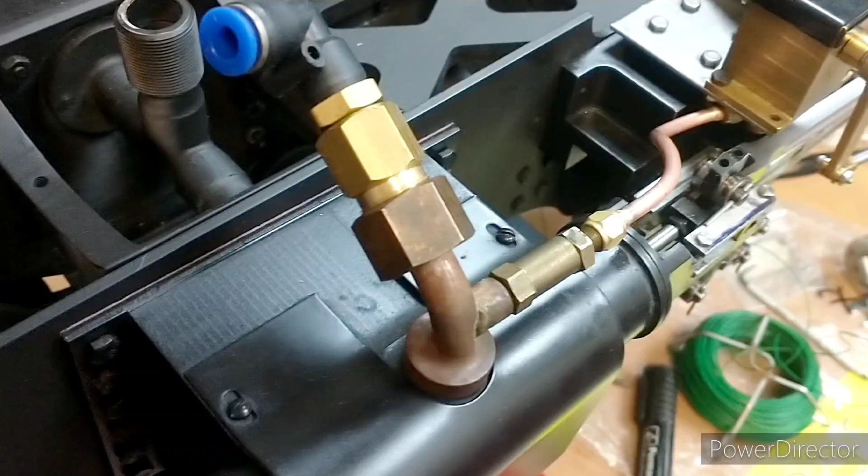So today we'll have a little bit of a break from the valve gear. I don't have so much time this week because I had to go to a wedding at the weekend, so I thought I'd just have a slight diversion and look at the lubricator setup.

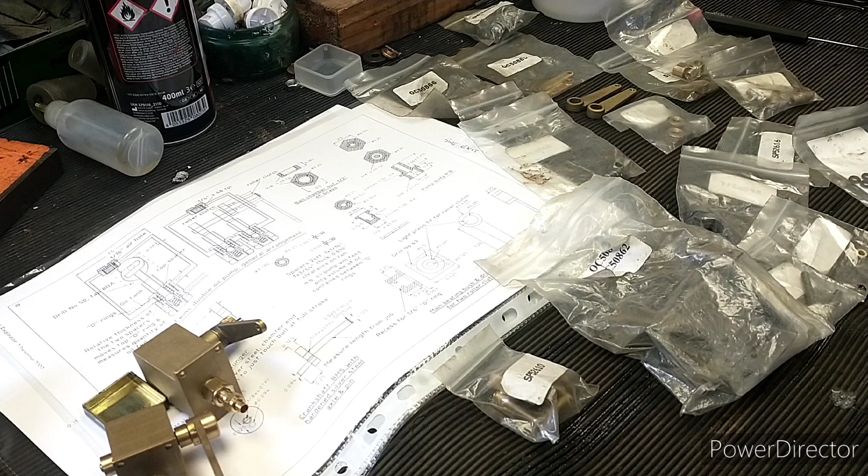So what I wanted to do is explain a bit about the lubricator design that's used by Modelworks. It's actually quite a well-known design, and you can still buy the kits for it to this day. I thought I'd explain a bit about it because it's quite an interesting design, and then I'll explain what I'm going to do with the Britannia in this particular case.

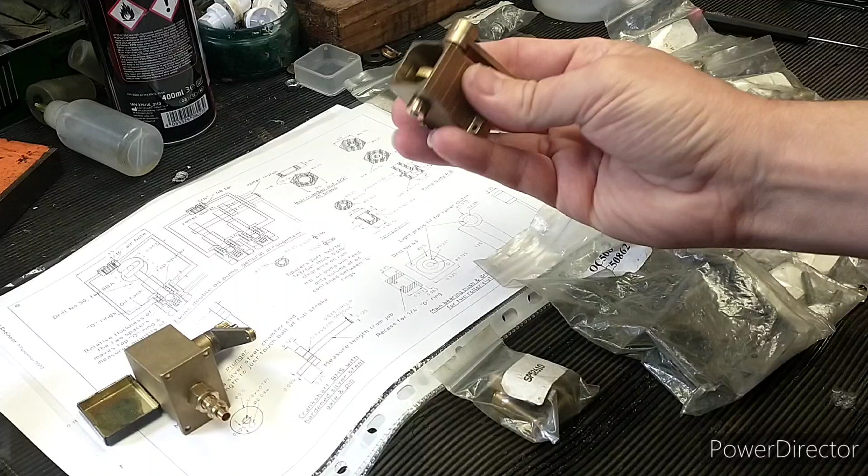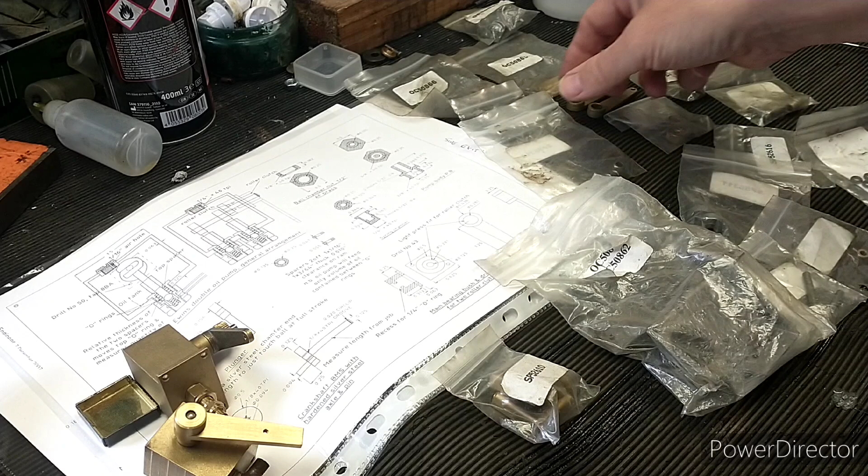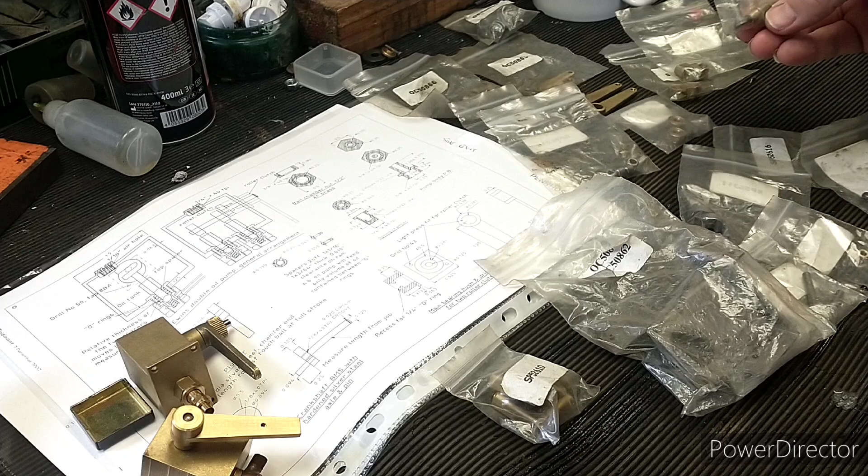On the Britannia kit, the lubricators weren't provided fully assembled like this. This is actually a Ewins lubricator that I managed to buy from eBay, but in my kit, which isn't complete, the lubricator came as lots of parts, and I've got most of the parts. The most obvious one is that I'm missing the bodies, which is a bit annoying because that's quite a difficult part to make. It's a cast part, and a few small detail parts of the internals.

But I've actually got quite a lot of the parts, so probably in the future I will use these parts to make up some lubricators. If that's something you'd be interested in seeing, let me know.

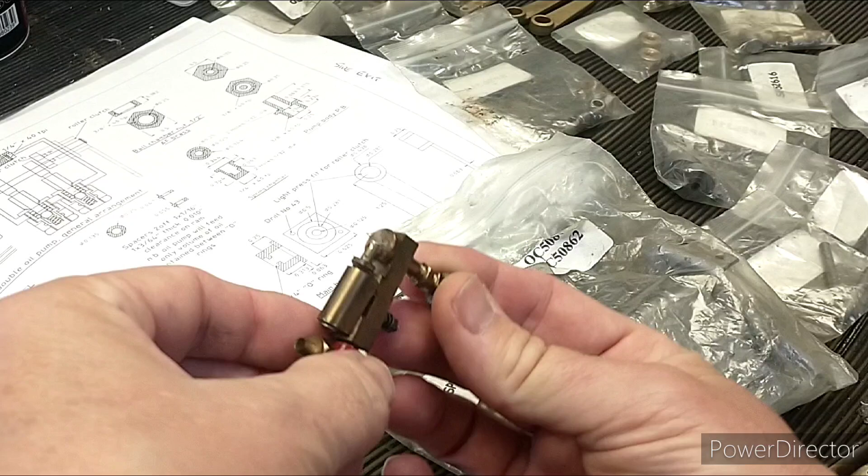So a little bit of history. When mechanical lubricators were first used in model locos, quite often they would use this sort of design.

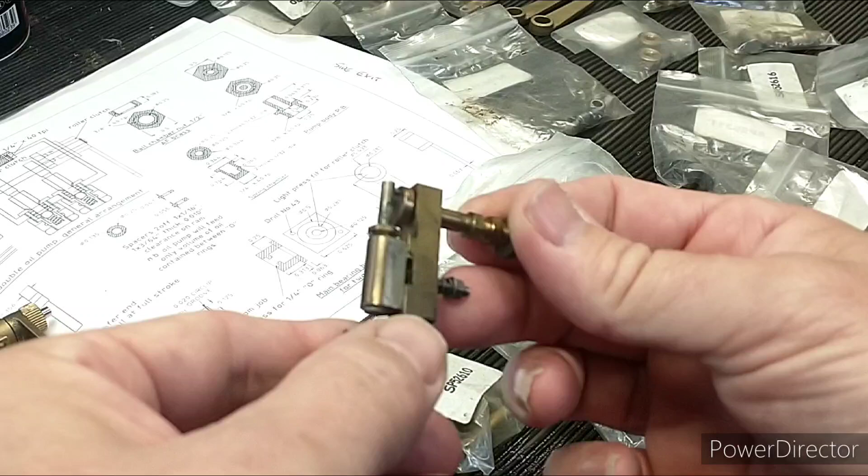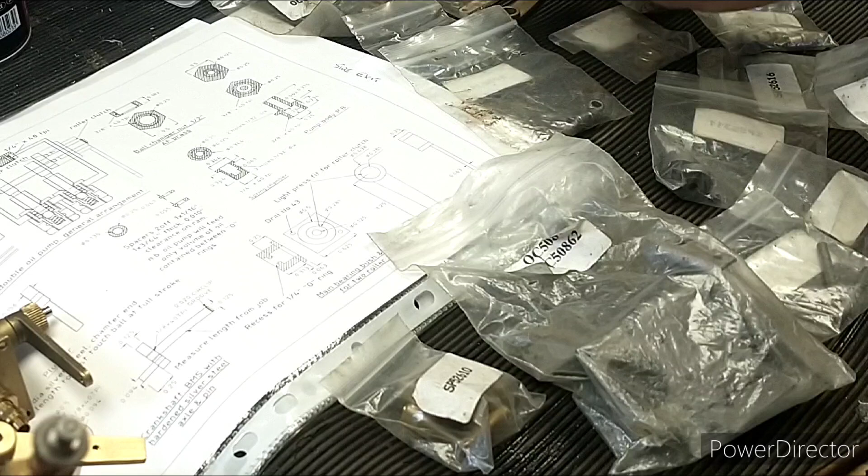Luckily enough, I've just got the innards of one here. On the outside we have a ratchet wheel. If you remember, I did a video on Caterpillar fitting a lubricator, and that had this sort of idea where you have a lever going backwards and forwards and moving a ratchet pawl, so over time this wheel would rotate.

But on the inside, what we've effectively got is a very small oscillating engine, and that's just a little oscillating pump, and that would just pump a very small amount of oil for each rotation. But it's actually, if you look at it, it's actually quite a complex thing to make. There's a lot of parts and quite a lot of accuracy required to make those parts.

But you've got a non-return valve here. I'm not sure where the inlet would be actually. Not that clear. But that's sort of the LBSC style lubricator, as far as I know.

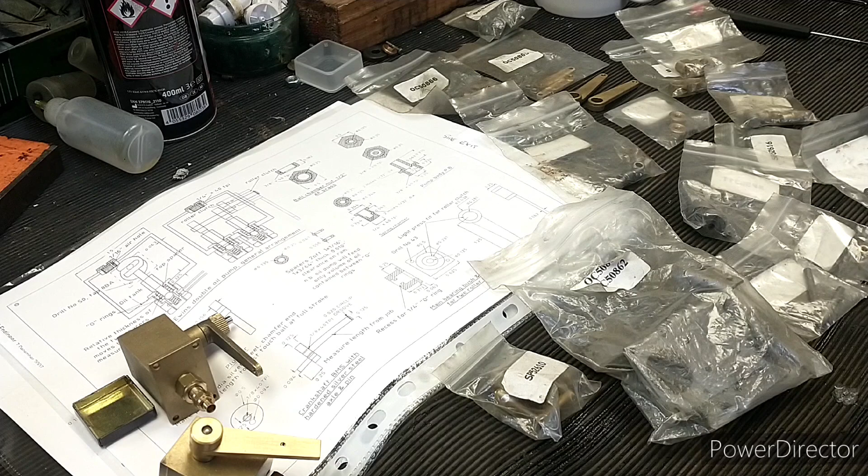So the Winson and Modelworks lubricators are based on a design which originates from a guy called Jim Ewins. I don't have a printout of his original articles, which are in Engineering in Miniature, but there's a couple of designs in Model Engineer that used his design.

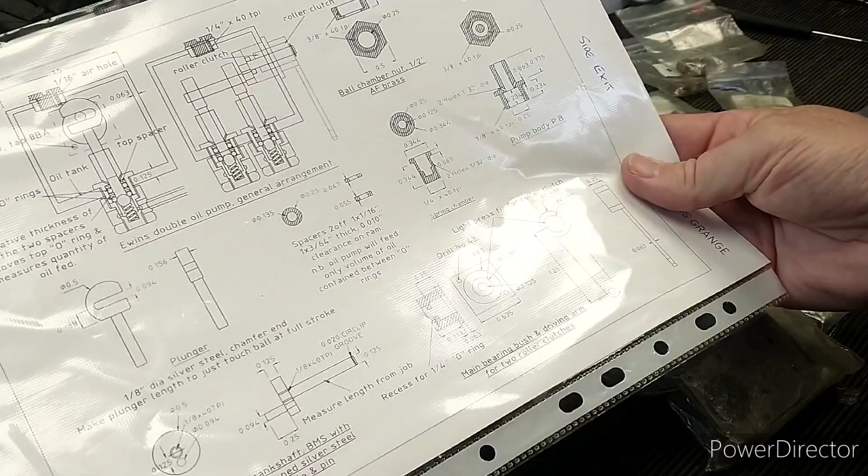So this one's from Model Engineer, 7th of December 2007, page 687, and this was the design for Penrhos Grange, and this is actually a dual pump.

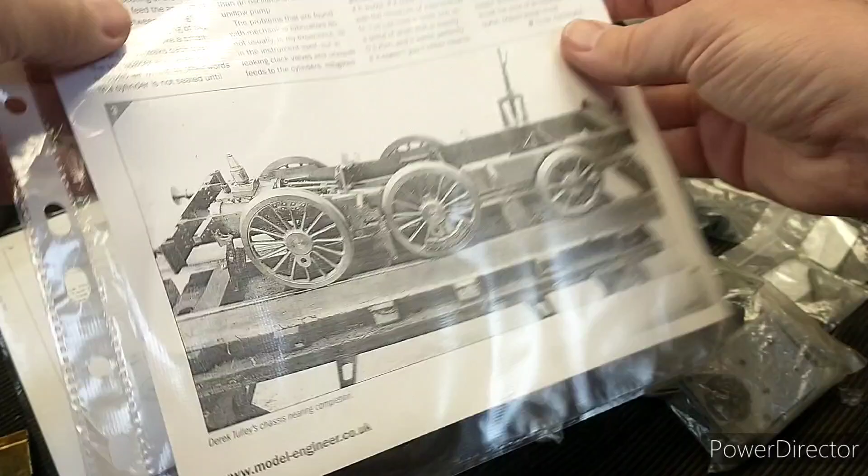It also existed in another design, Model Engineer, 13th of August 2010, page 210, and this is for a single pump design. Now I've printed both of these out because...

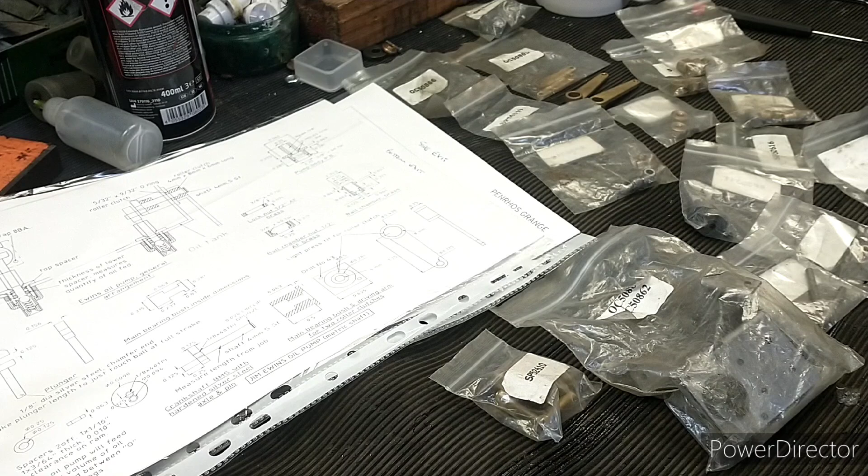If you buy, you can buy these kits from LiveSteam Fittings. I'll provide a link in the video if I remember. I believe they had some connection with Modelworks, whether it was a spin-off company from Modelworks, but that's still going today.

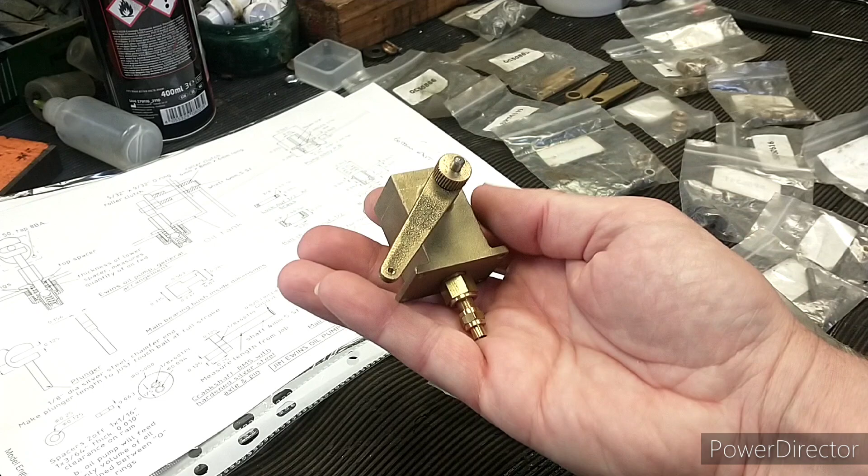And if you buy a lubricator from them today, this is basically what you get, something like this. And you'll notice it has a bottom feed. The Modelworks kits, on the other hand, have an elbow feed, and that's what we really need for Britannia.

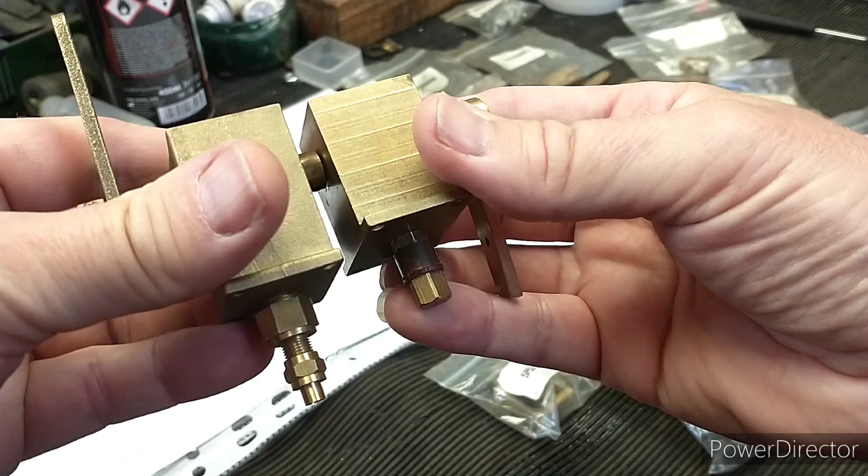So I've got these two. Obviously they're different size. I didn't realise they were different heights. Oh, that's annoying. Oh well, you probably won't notice. I might have to cut some off the top of that one. In fact, interestingly, there is a line there.

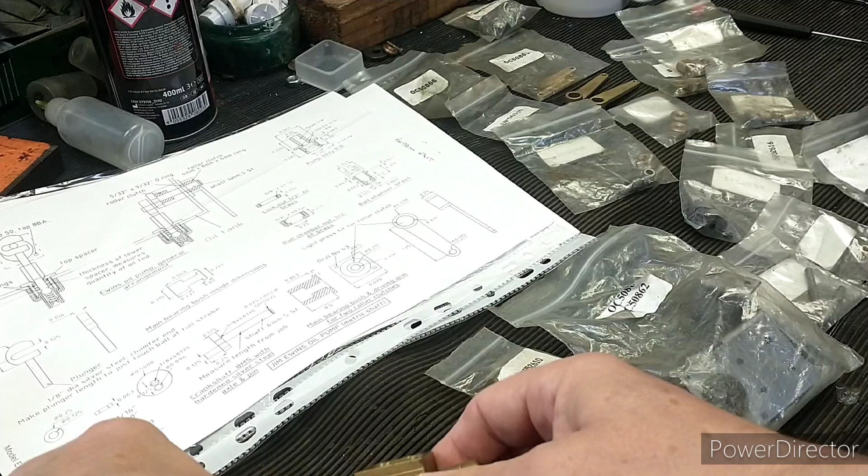So what's so good about the Ewins design then? He came up with a couple of innovative ideas.

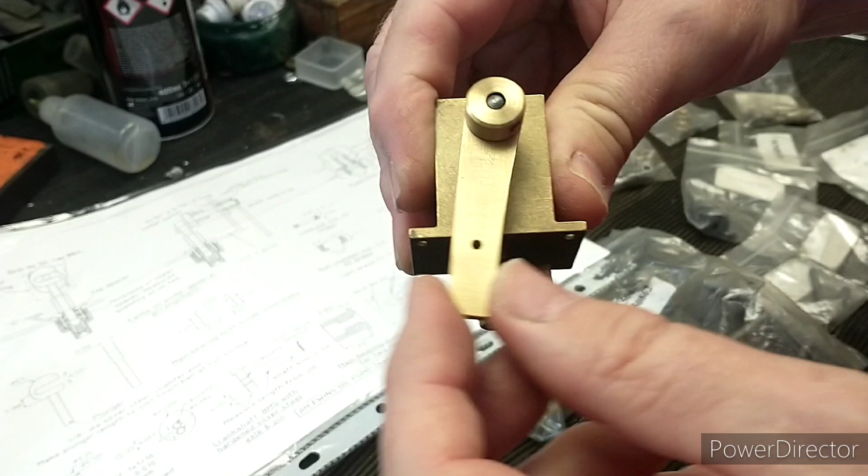The first thing is he got rid of the ratchet wheels. So you'll notice if I just rock this backwards and forwards, there's no ratcheting sound at all. It's quite smooth, and the oscillating action is turned into a rotary action. You can see that easiest on the front.

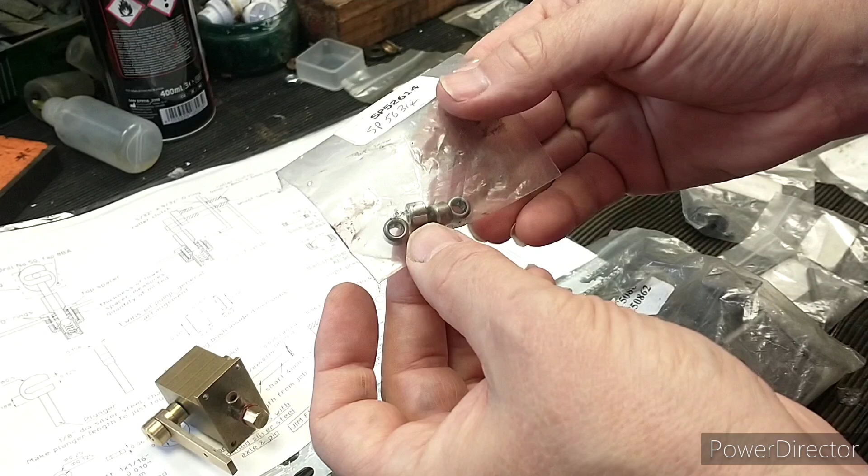So how does he do that? How does this magic happen? Well, he does it with these things. Now, they might look like very small bearings, but actually these are roller clutches.

A roller clutch, you mount it like a bearing, so the outside is fixed and the inside has a close-fitting shaft. Basically the way they work is that you can rotate the shaft in one direction, but when it comes to the other direction, it locks up. It just uses some clever geometry inside the bearing to do that. These are quite reliable as long as you keep them clean.

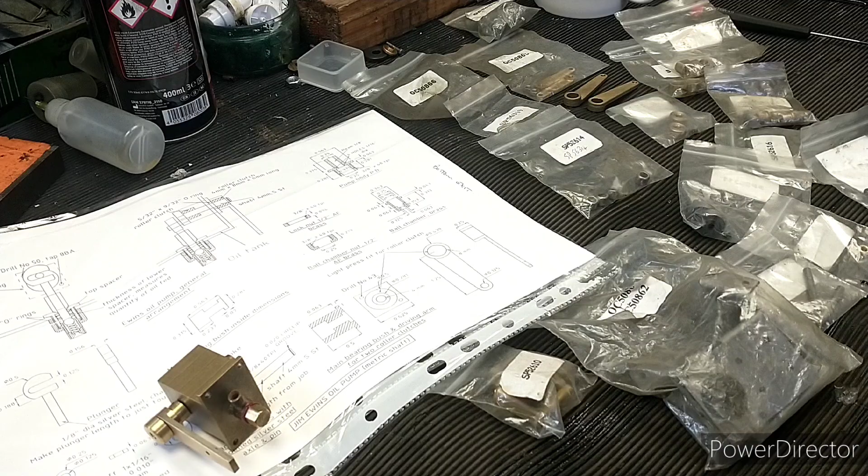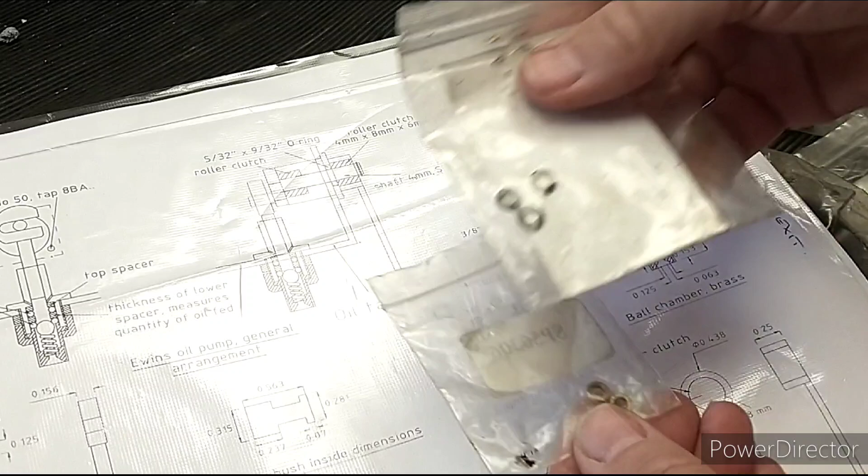So that was the first innovation that Jim's design used. And the second one, it's quite hard to see on the drawings, but the pump plunger basically goes through two rubber O-rings like this, and in between the O-rings is a spacer.

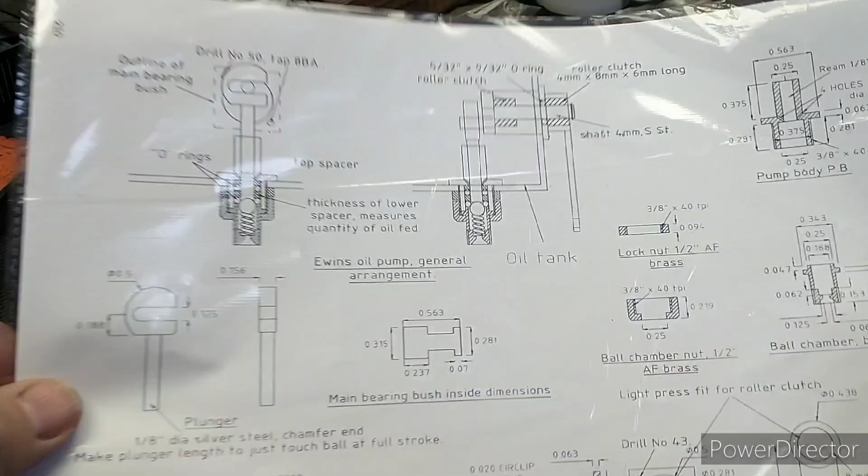So a very small, thin spacer. Let's just see on this drawing. You have an O-ring here, an O-ring there, and in between is a spacer. The gap between the two O-rings determines how much oil is pumped.

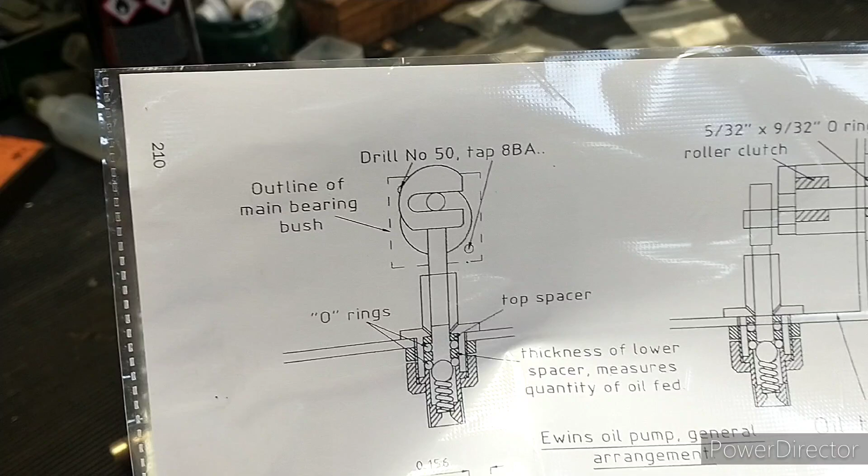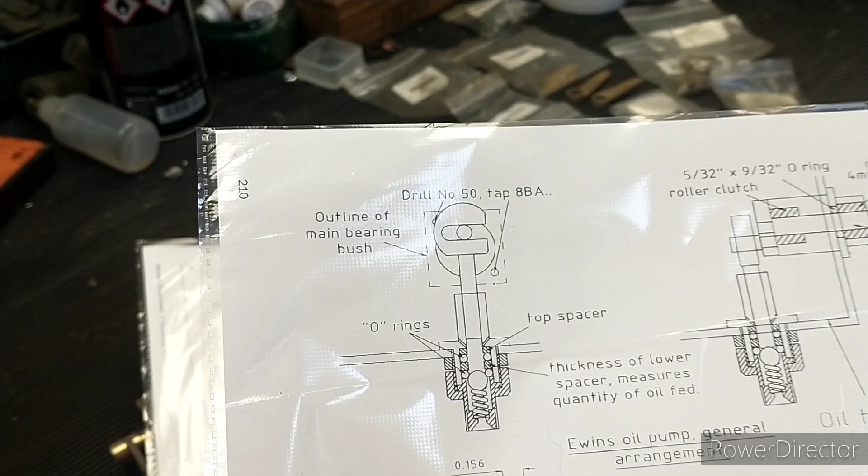The other nice thing about this design is there's only one non-return valve, which is this spring-loaded ball bearing here, and that seats up against the O-ring, so you get a very nice seal. Those things together combine to make a very reliable lubricator that works very well.

There's quite a few people in the model engineering community who really like these, and I'd say you can still buy them.

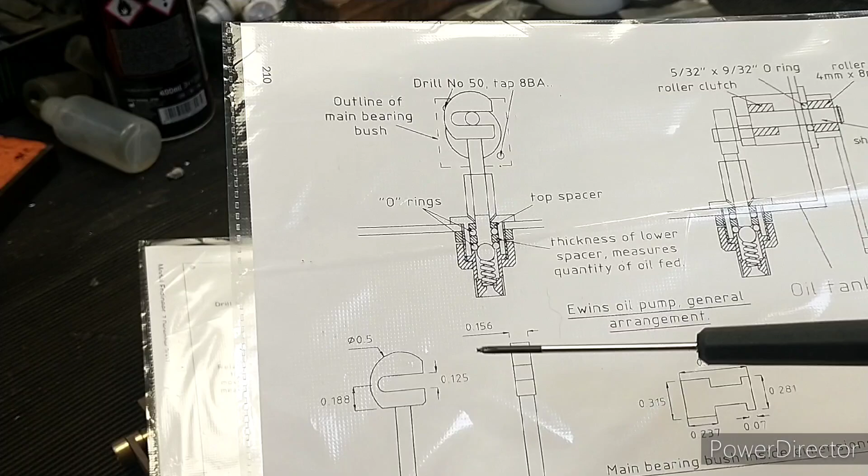So while we're looking at this drawing, you'll notice Jim's original design is the plunger has this sort of C shape. Basically what that is, it's a Scotch crank, effectively, so that as this crank turns round, you've got a crank pin there, it will go round and push this down, so it'll move to the left and push it down.

And then on the upstroke it will then pull the plunger up again. So we can actually see that on this Ewins designed lubricator. You've got the Scotch crank there, slightly different design, but it works in the same way. So again, that's like a C-shaped thing, which is quite a difficult part to make.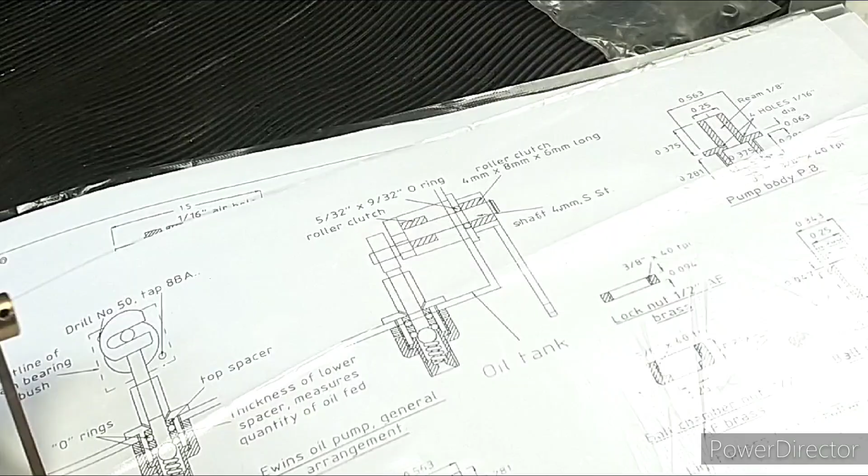If we then compare that to the more modern one, what they've done is get rid of that crank and just have a flat topped plunger, which obviously means that there's nothing to pull the plunger back up again. I'm not sure if you can see in there, but there is actually a spring underneath the head of the plunger.

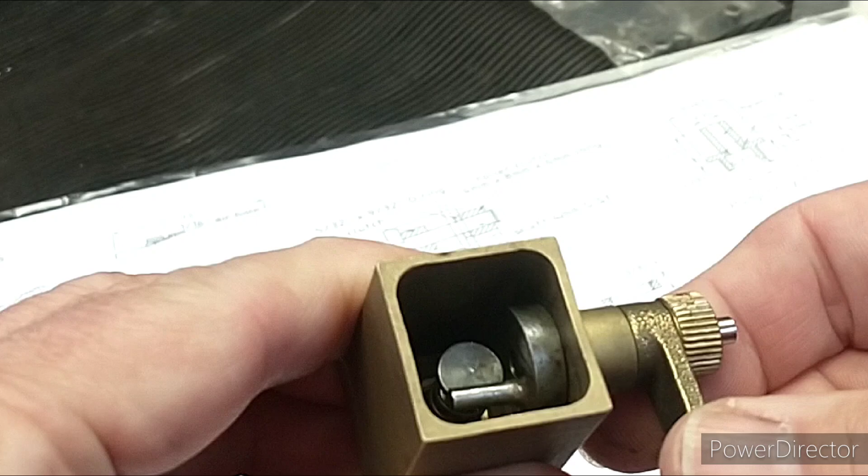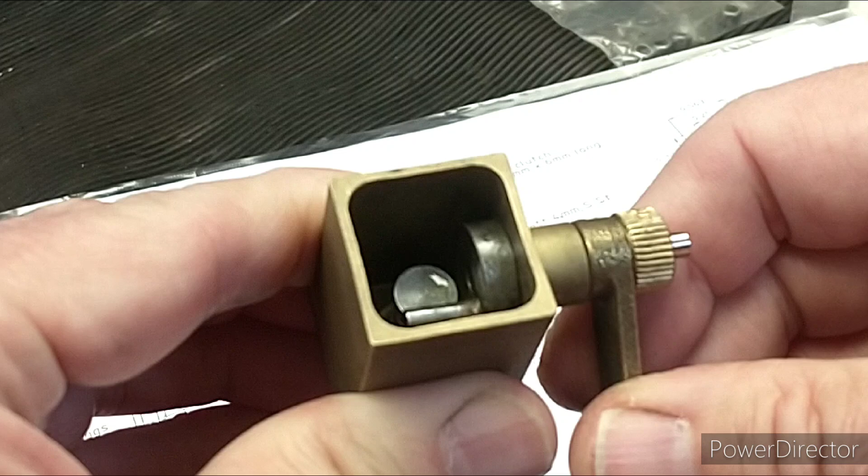So that as it gets to the bottom of its stroke and starts to come back up, a spring just helps it back up again. And that pops up quite quickly actually. Pop, like that. So that again makes for a much easier to manufacture design, which is quite clever.

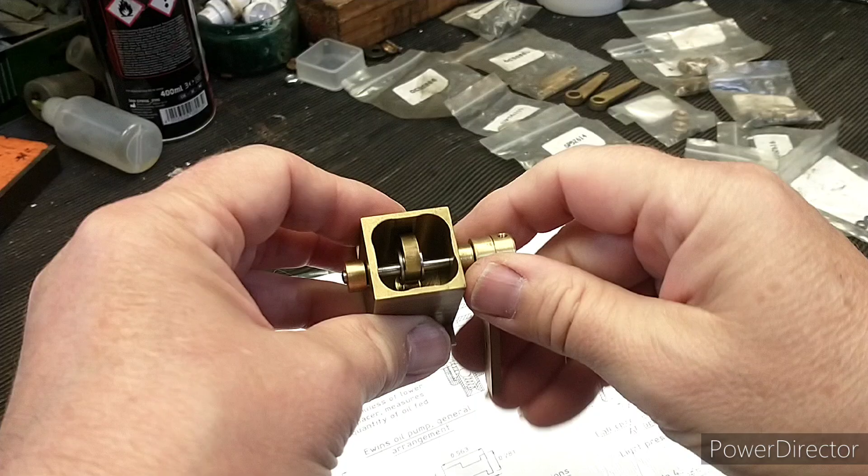So I thought you'd find that interesting, just a little aside as to different designs of lubricator. I do actually have yet another type, which I believe comes from Polly Models. Not sure how easy it is to see in there, but they use the one.

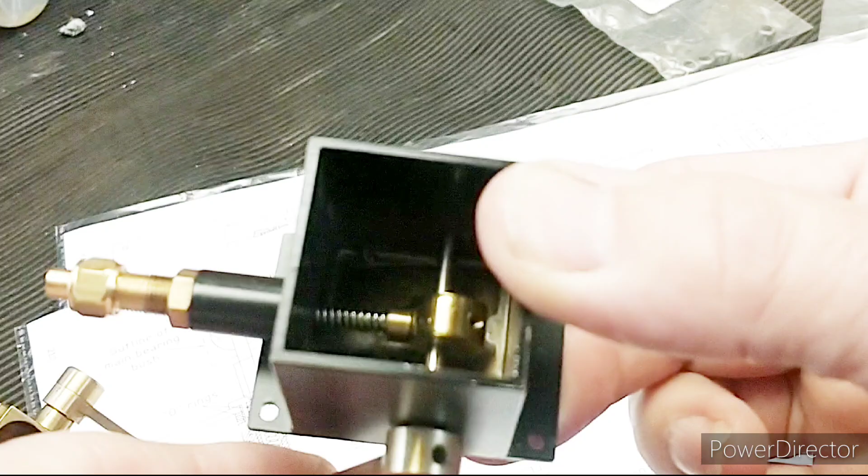Actually, no, they don't use a crank. They get rid of the crank completely, and just have effectively like a crankshaft. So as this moves backwards and forwards, the pump plunger moves backwards and forwards, which is quite interesting, really, because what you've got is effectively a linear motion, a backwards and forwards motion, and that's what the pump needs. So they've gone, well, we don't need to convert it into a rotary motion in the meantime.

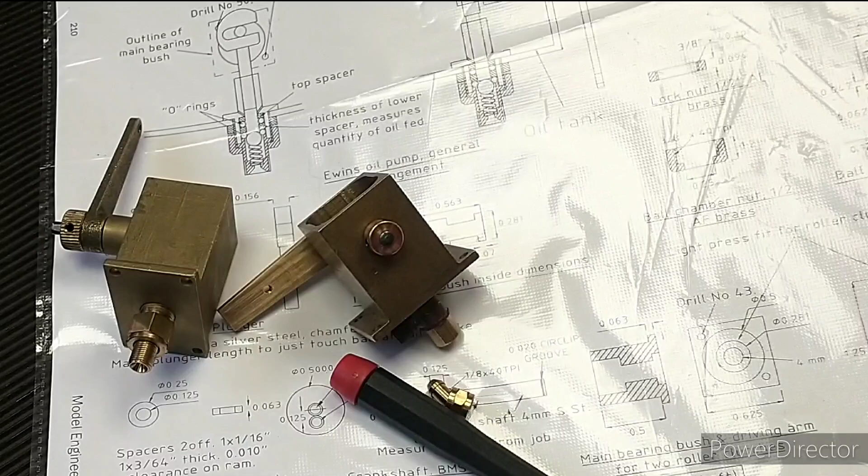So again, that's quite a clever idea, and very simple to manufacture. I'm not quite sure what's in this area, maybe they use the O-rings as well. The good thing about what I've got in my kit is I have got the mounting brackets, and I have got these spacers as well, which are used with the mounting brackets.

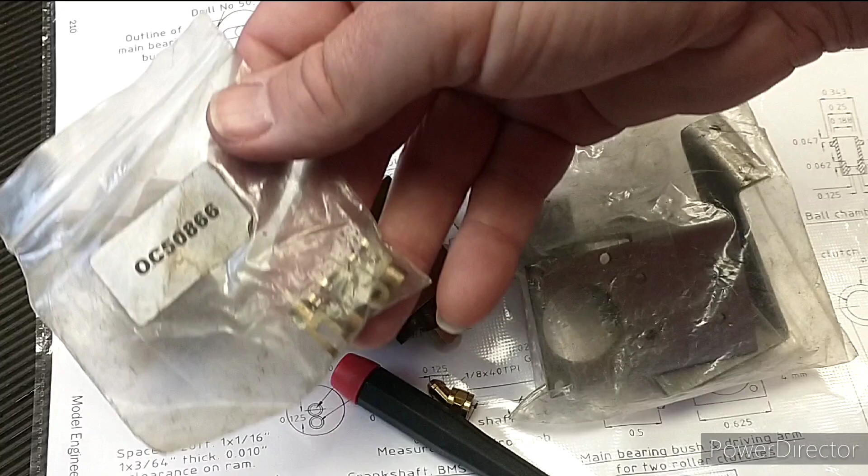I've got the drive arms for the valve gear, and I've got these. I'm not sure if I've got the pins for these, but we've got those as well. We've got most of the mounting parts, so what I'll do is put those on the left hand side just to give you some idea of what it's going to look like. I think that would be useful, and we'll take it from there.

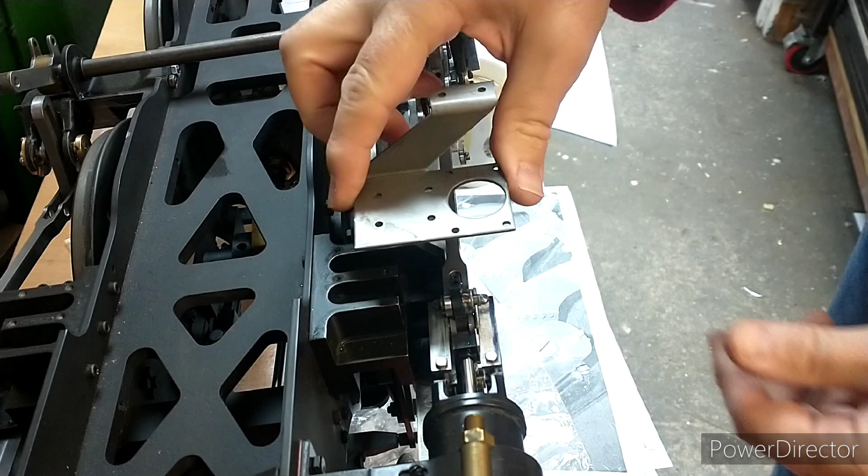So the first job is to mount the lubricator mounting bracket. As you can see, if it's just mounted directly onto this casting, it's going to interfere with this. So Modelworks provide you with a little spacer, which I need to clean up, which fits there. That goes on there like that, but there's still very little clearance. There's not much space for the oil port to come through this area, so it's basically got to come through here up to this one-way valve on the steam inlet side.

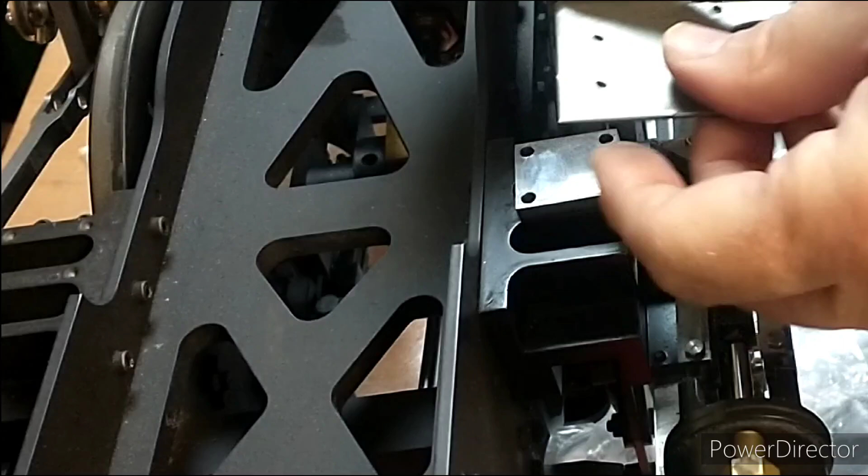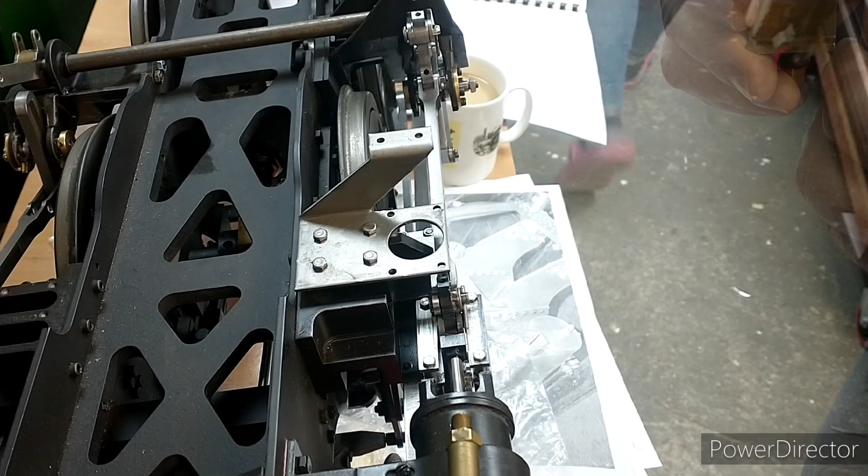Okay, so that's the lubricator bracket in place. Let's just trial fit one of the lubricators. Okay, so that's just held in place with a couple of loose bolts at the moment. The clearance is very tight, so this actuating arm is getting very close to hitting here.

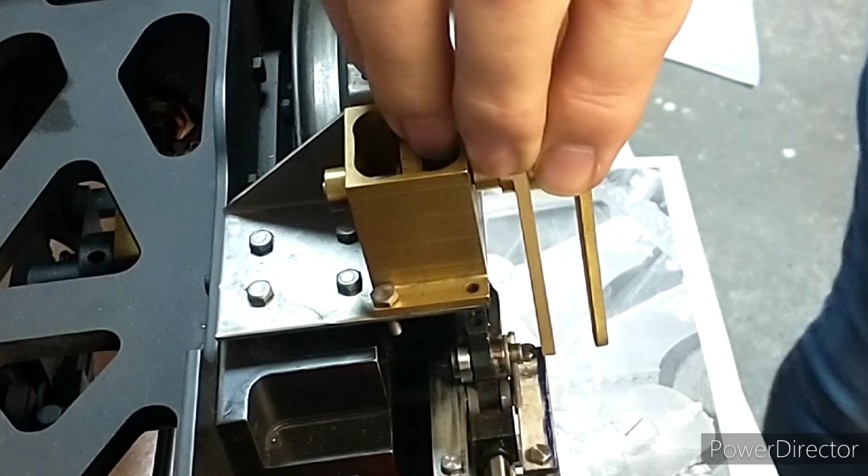So one thought I did have was to change the actuating arm. This is the one that came with the kit. It's basically the same size, but this one is obviously cast, which is nicer.

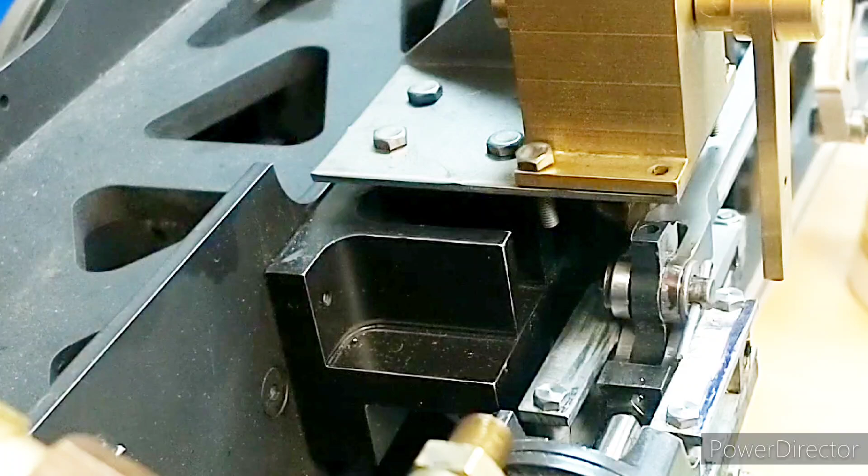That gives you a better view. So we're going to have a lever driven off the valve gear here, which will be pushing this, and there needs to be a pipe coming up here through this gap and then to there. So I will need to make the pipe. I haven't got the pipe, so we'll add the actuating lever on here.

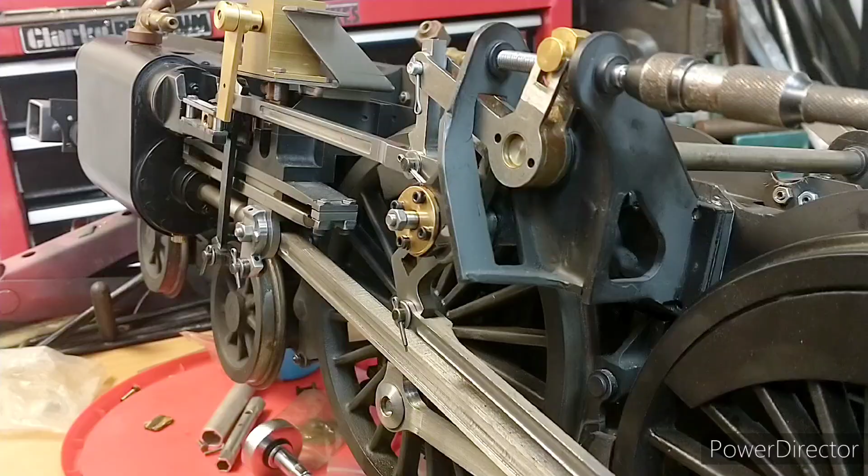So I'll move you again, I think. This is the end of the trunnion that holds the expansion link, and we have a lever and a nut to go on there, so we can look at those. I think they go that way around. Oh, that's interesting. That appears to actually be threaded.

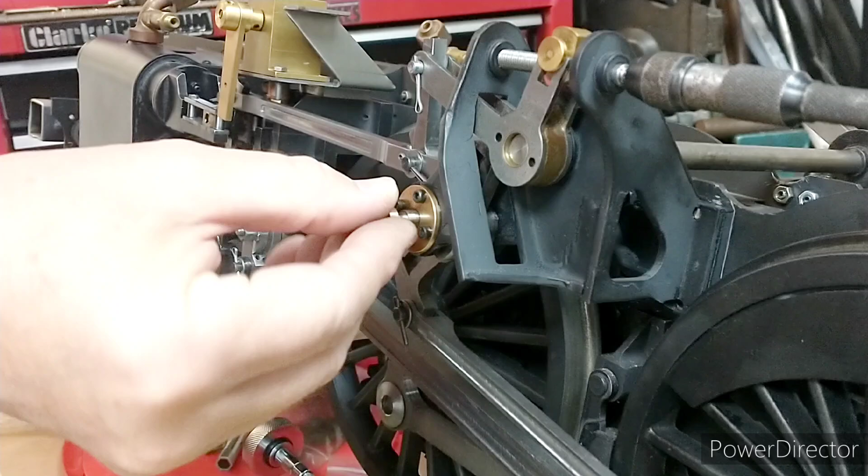Okay, so the pictures I've seen show this just ahead of the slot, so I think that's in fairly well. I guess that just acts as a lock nut. There's not a lot of -- might have to add some Loctite to that, but yeah, so that's how that fits.

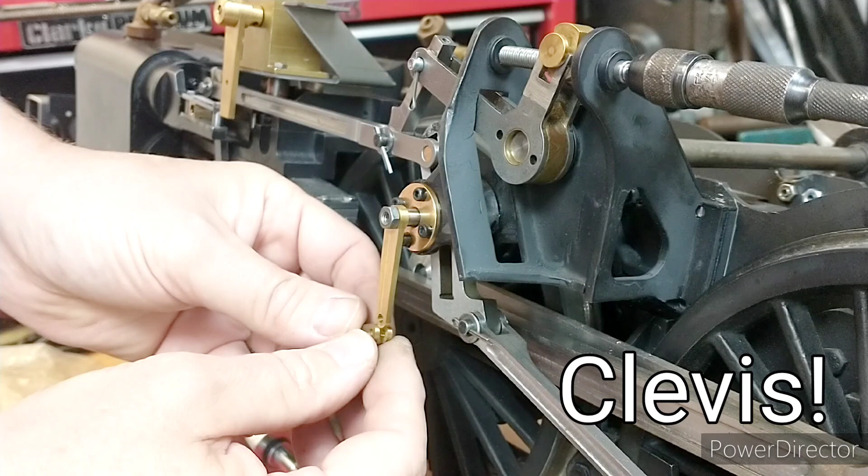And then obviously we then need a linkage that goes between the two. So we haven't really got all of the linkage parts. We've got these. We don't have the pins, and we don't have the rod that goes between the two. Now, looking at the drawing, the rods seem to be about the same size as this, but I think that might be a little bit small. Well, maybe not actually, once they're in the end of these.

So these are threaded M3. I'm going to see if I've got any 3 or 4mm bar that I can use to make a rod from. I'll drive on that. It's quite loose actually, so it's got a bit of leeway, which is good because these do not line up vertically at all actually. So we'll go with that.

So I'm going to thread -- basically these are threaded all the way through, so I'm going to aim for threading into just the round section. We'll see how that works.

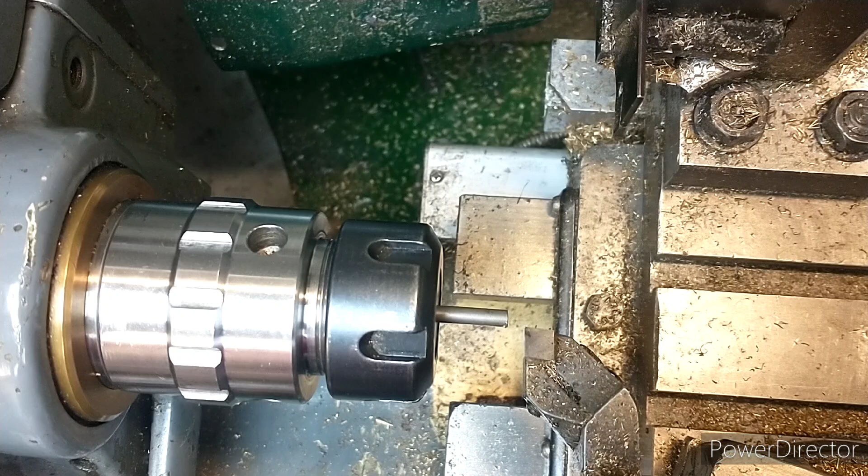So I've had a few comments about always running stuff at full speed, speeded up. So as these are quite simple, I thought I'd do the first one in real time, so it won't take too long, just so you can get a feel for the speeds I'm running things at.

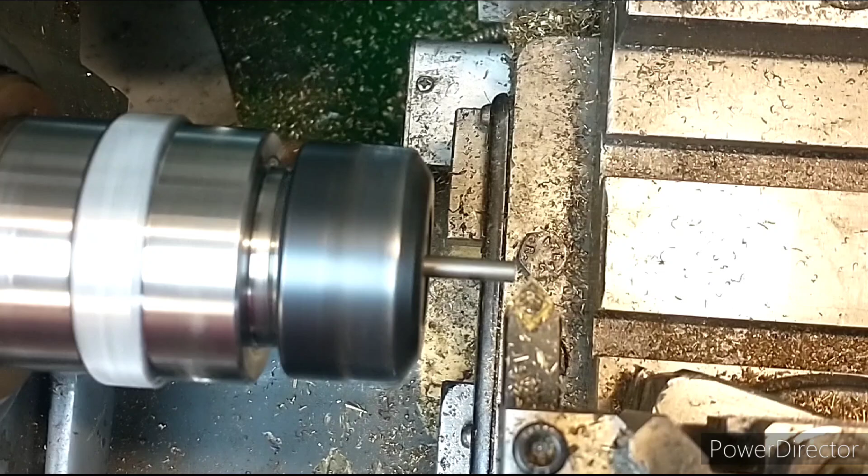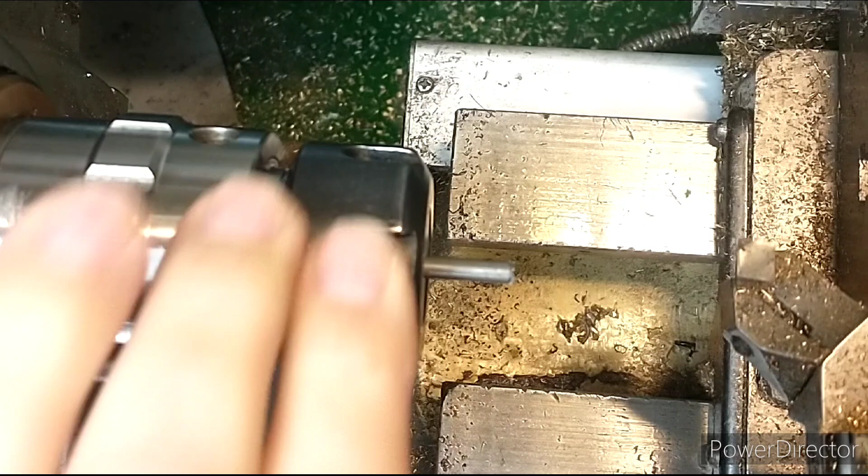So we're just cleaning the ends of the bar up here, just from the original saw cut. That looks nice. And then we'll chamfer. Forgot to do -- this is a 4mm piece of bar, and we want a 3mm thread on it, so I need to cut it down to 3mm, zeroing off the DRO.

In about 7mm there, let's see what the diameter's looking like. It's 3.33. Pop that in the DRO and just drop it down to just a shade under 3.

Again, just to do a spring pass because it's quite a flimsy piece of steel now. 2.91, that's lovely. You don't want it to be exactly 3 when it's a thread, because otherwise the threads are never that spot on with size. Put a slight chamfer on that, because again it's very delicate now. And that's the machining done for this end.

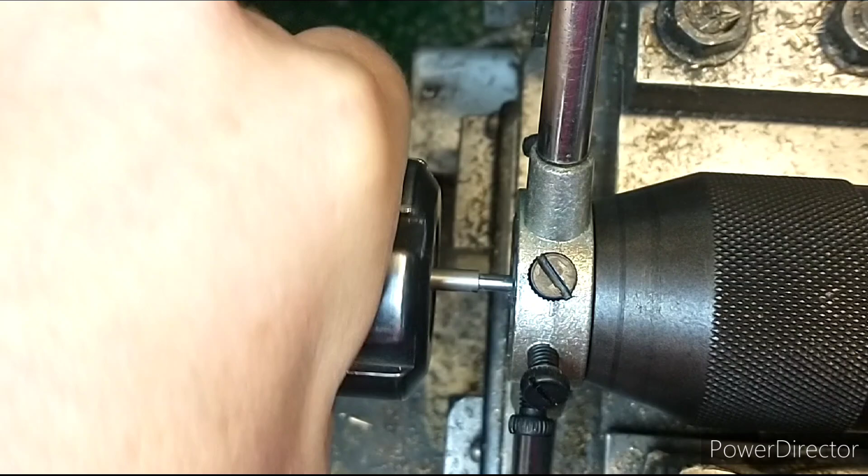And then we just need to tap a thread on, so I'm just going to do that by hand, but with some support from the tailstock chuck. So what I tend to do is just rest the handle on the cross slide, and I can apply pressure with the tailstock handle whilst turning the chuck. As you probably saw, I tightened this up just by hand, and it's now starting to slip, so I need to just tighten that up a little bit more.

So I've got some cutting oil, so I think we'll give it a quick splurge of that. That's better.

Just back cut the swarf a bit, so we're getting some quite long bits of swarf coming in. Back cut it. So when I say back cutting, we're just backing the die off slightly just to break the chips. Otherwise you just get a very long chip and it tends to jam.

It's not so much of a problem with mild steel, but with stainless those chips can be very, very tough. They tend to be work hardened, and then they tend to tear up the threads. I've had that happen a few times recently. It's not much fun.

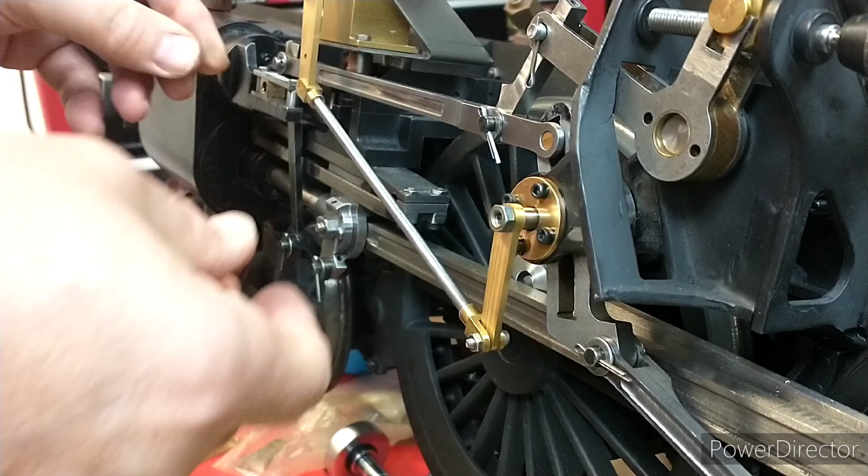Okay, so we've got our actuating rod made. So I'm just going to thread it into this one like that. Just pop that one off for a second. Come out one. So that's not quite vertical on this one, but should hopefully do the trick.

So this is just being held in by friction at the moment. But I think the rod's the right size, so that's the most important thing. I can extend a few mil either way.

What's happening at the moment is this is a very tight fit, because this is at a slight angle. This is putting some twisting pressure on the arm, and we can perhaps ease the corners a bit just to remove any discrepancy, because basically from here to here we've got probably about a 5mm difference. I mean, we've got freedom on this side but not on this side. I think that's possibly what's causing the problem.

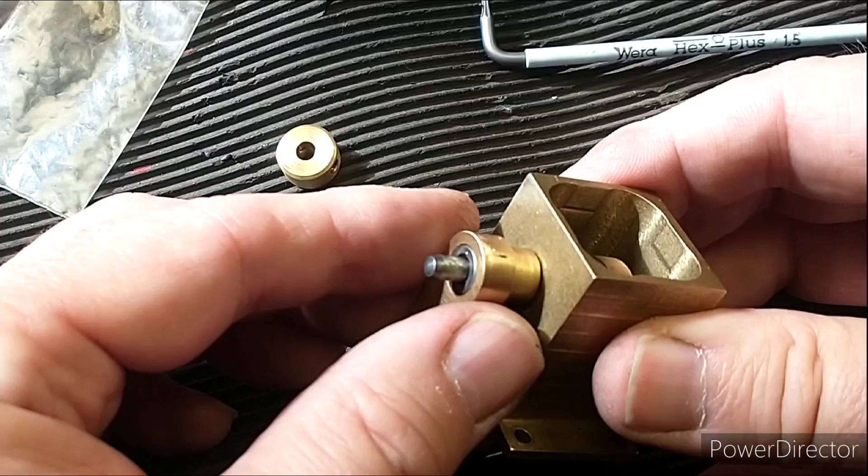Okay, so let's get to the bench and see what we can do with this operating lever. So I was able to remove this collar quite easily. It's just a 1.5mm grub screw, and just to show basically that's one of the one-way clutches in there. Not sure if you can see it, but you can see there's no attachment to this at all.

This rod, I can move it out a bit, but as you can see, by oscillating the lever you get some pumping, so that's good. So what we need to do now really is make...

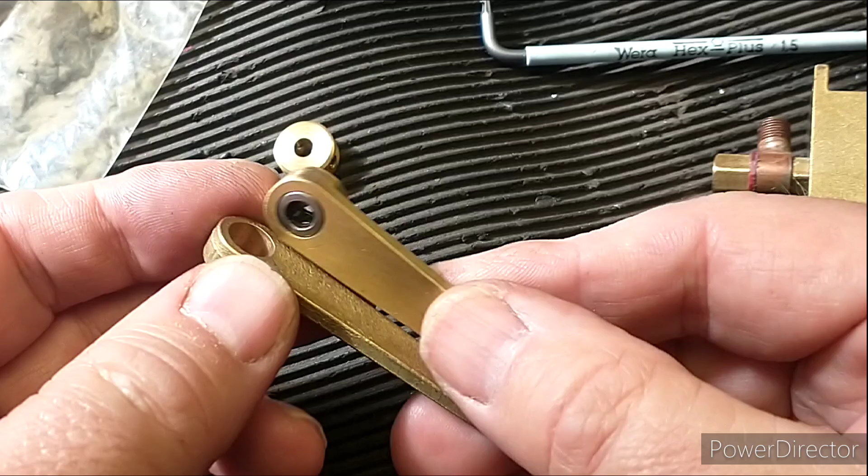It's not exactly the same length, but basically make the end of this look like that, so much a nicer taper and a rounded end. So after engaging the brain for a few milliseconds...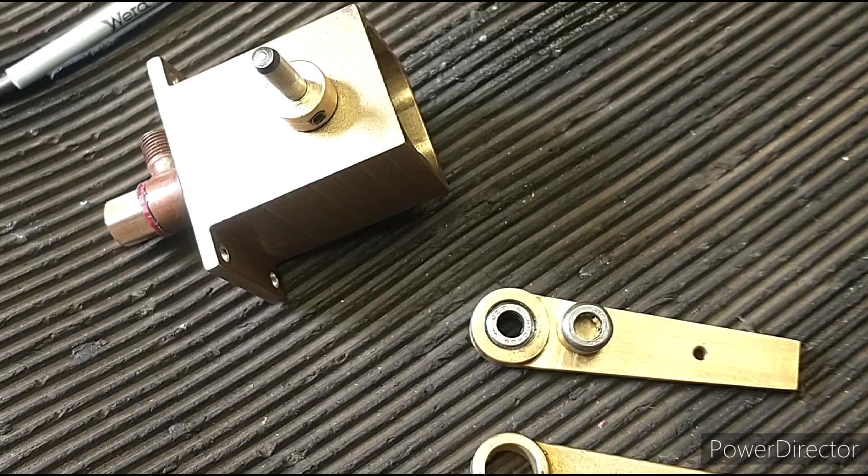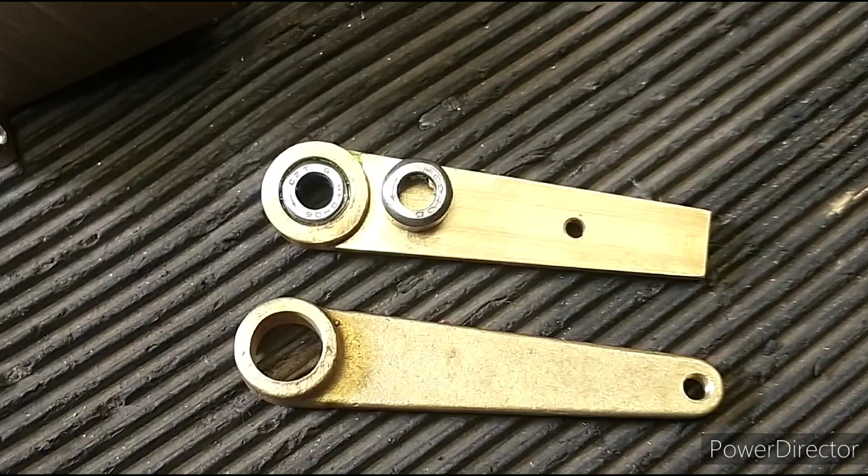It occurred to me I could just use this lever by pressing in a one-way clutch. So I'm just going to bring it in a little bit closer, hopefully you can see. So the clutch on has actually got a little arrow here and here showing the direction that it rotates in.

So I'm going to pop one of these in. So it needs to match what the original lever had. So we'll press that, we'll try and press that in, I think. Don't know how easy that is to do. Will it just push in, do you think?

No, that needs to be pressed in. Probably do that in the milling machine. Let's see what we can do.

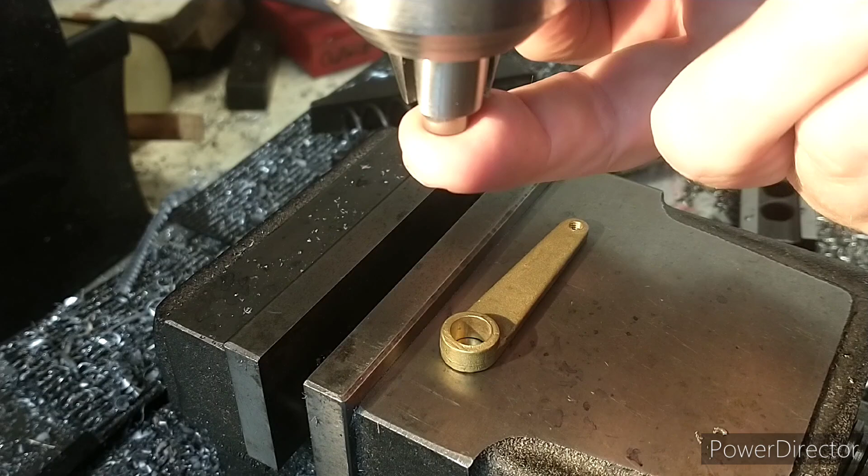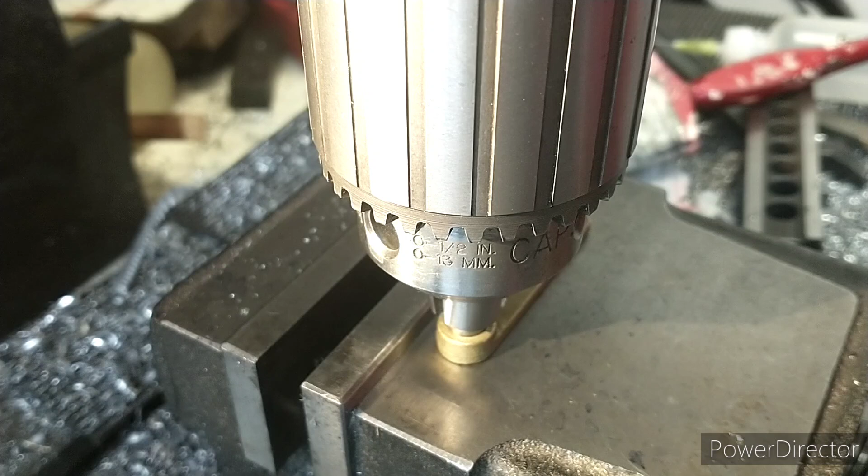Okay, so I've mounted a 4mm shaft in the chuck, and the clutch is just pushed onto the shaft, and the back end of the clutch is pushing on the chuck jaws. So what I'm hoping is I can just use this just to push it on. Body, breathe in. Oh, there you go.

So hopefully that's done the trick. It's certainly gone in. Does it turn? Oh yes, it does. Does it still clutch? That's the question, isn't it? So the clutch is still working, so that's positive.

So we've got the reoccurrence of a familiar problem here. This won't go any higher than this, so it can't go any further back. And because it's actually touching here, we've had that problem before on other bits of the valve gear where we haven't got clearance.

So what I need to do is take a chamfer on this side. So if I mark that, it's quite a small piece, so I think I'll just do that in the vise with a needle file, and we'll see if we can get some better freedom of movement.

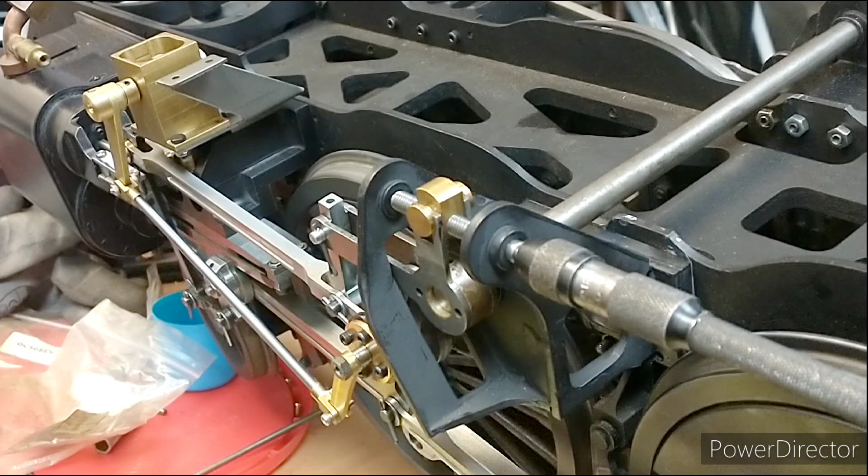Okay, so after a bit of fettling, I think we've got something working now. So what we had to do was remove a bit from this corner, and I've also had to, just on the valve slide bar, we were hitting there as well. So I've had to move this lever so that that's as far forward as it goes. But hopefully you can see that this is slowly turning.

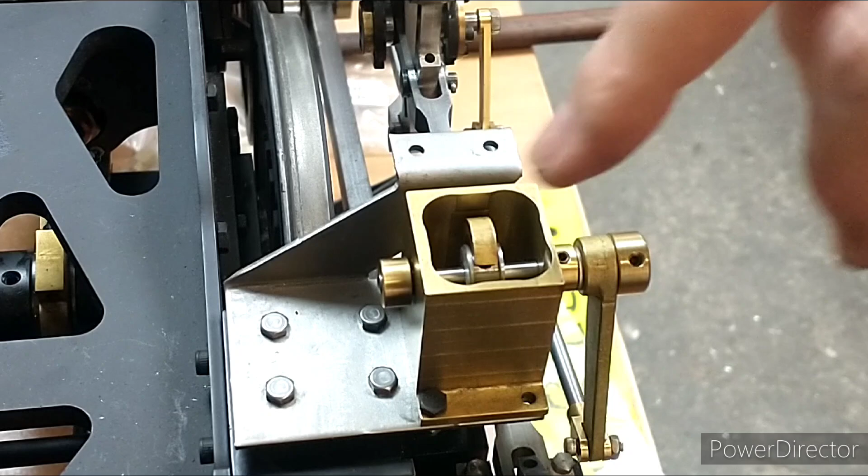Okay, so now I've brought you so you can see this moving. So it's not moving fast. So that's pretty much good to go on this side.

I need to make up a pipe next, so I might do that today. I've got a bit of time.

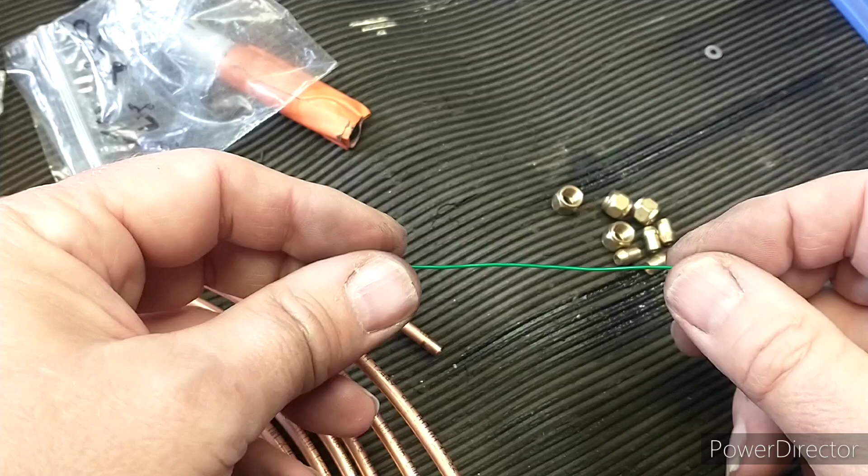Okay, so I've measured the distance I need in terms of pipe work with this bit of flexible wire. So I need to make 2 pipes this long. Obviously we'll be making them into a convoluted shape. I've got the fittings I need, which are all 1/4 40s. I had a bag with 4 of them in. So I'll put you on time lapse so you can watch me cutting these up, deburring them, and then hopefully silver soldering them.

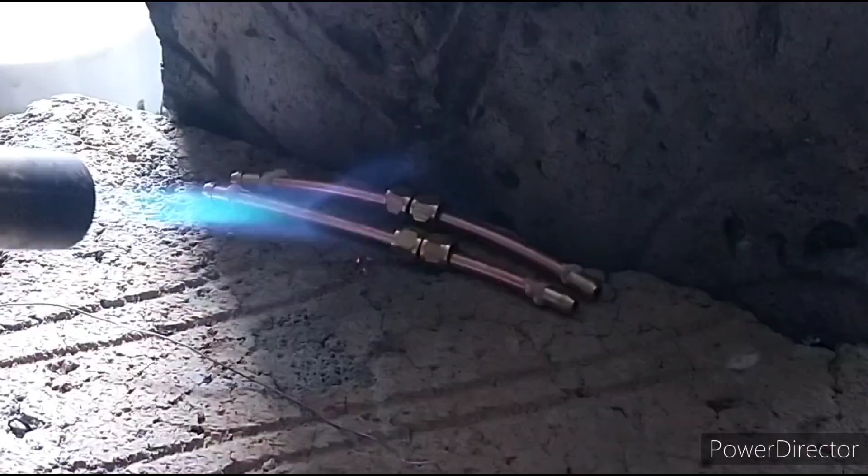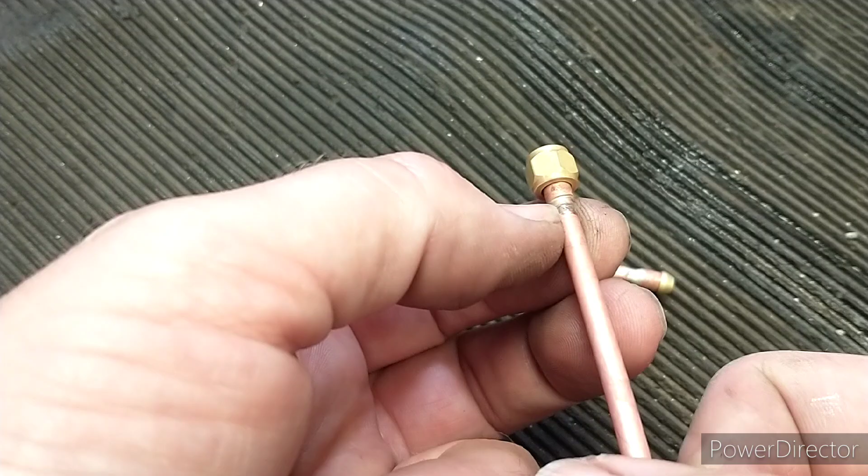Okay, so that's the 2 pipes made, 1 for each side. Pretty happy with that, how those come out. This one looks a little bit light on silver solder, but it might be okay actually. I'm a bit heavy on these ones, but they all go through, so happy days. I might need to clean that up a little bit, but overall not too bad. So we'll get that installed and see what those look like.

Okay, so that's the pipe fitted to the left hand side. You can see it's very tight in there. So that's the problem we've got to solve for the other side, is how do we get the lubricator to fit into such a small space.

Using this arm has worked out really well. We've struggled a bit with clearance just here. And again, we had to do a little bit of a mod there, but overall that's come out pretty well actually. I'm quite pleased with how that's come together. I think this bracket's to hold the running boards later on, but that's quite a way away yet. So yeah, I think that's lubricator done for the left hand side.

I've got a few options for the right hand side. I can modify that complete one that I've got somehow, or I could use the parts I've got to manufacture one to match that. So let me know what you'd prefer to see. Would you like to see me manufacturing a new body and a few other bits so that we can use the parts that we've got and save that commercial lubricator for another project? Yeah, let me know what you think.